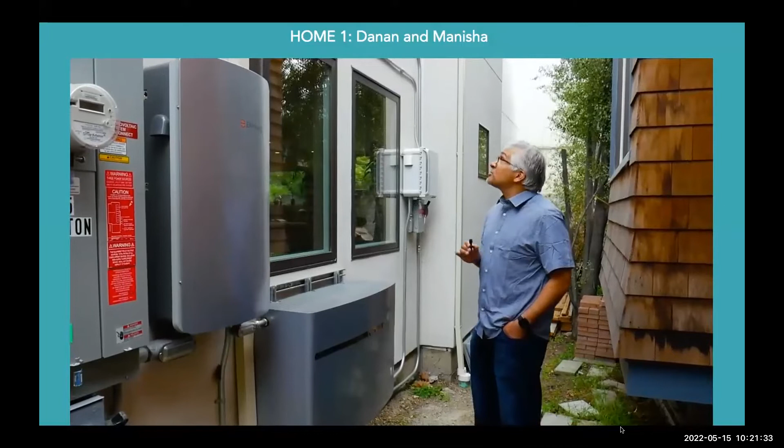We have both solar and storage on this house. This is a 10 kilowatt hour Enphase battery system. We use it both for offsetting peak electricity usage from the grid, and also as a backup battery in the case of grid outage. Something unique about this was that I installed this system using Enphase's self-installer certification program, which is a course you take to certify yourself to design and install these systems.

So we are doing a number of things in this house to effectively load shift our electricity usage. And I want to go over a few of those things. One of them is the electric vehicle charger here, which is enrolled with a program that ensures that the EV charges when electricity is cleaner and also cheaper. And I get paid a small incentive from the EV charger manufacturer to participate in their demand response program.

Thanks for visiting our home. We hope that you're inspired by what we did here to make our home greener, more efficient, more sustainable, and more comfortable.

All right, now we have Dan in here to answer some of your questions. Dan, can you undo your video? Hi. Hi, there you are. And I have, coincidentally, my architect sitting right here, so. Oh, that's exciting. Right on. Yeah. So Rebecca's going to ask the first question.

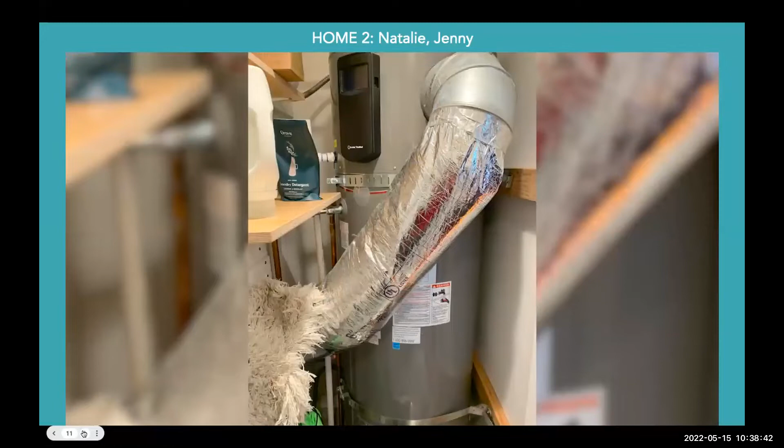As part of making this small house comfortable for everyone, Sarah figured out a way to create a small patio that provides a private outdoor space separate from the rest of the property. Thank you for visiting our home, and I hope that some of these green features have inspired you for your future building projects.

Okay, so that was an extremely cute ADU. And today we have Jenny, the property owner, and it looks like Natalie also was maybe tuning in. I saw her name briefly. Hi Jenny, how are you? Oh no, you're fine. I don't know why Natalie's name, maybe Natalie's name is on my link or something. I may have sent you the wrong one. Not to worry, okay. Everyone, we are talking with Jenny.

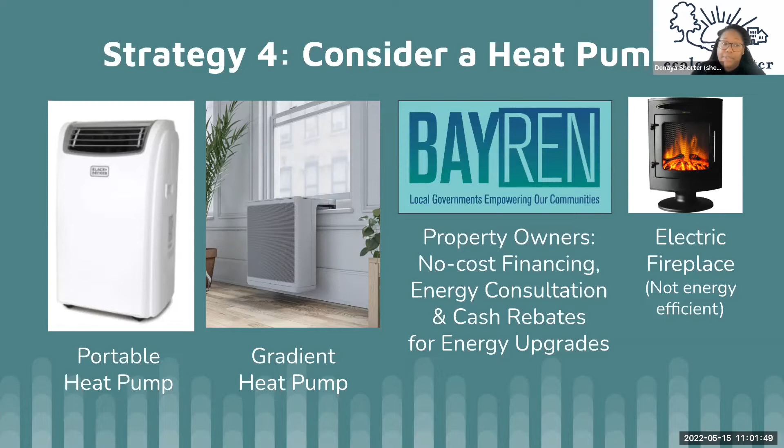And there also are other electric options for heating. Now, to keep in mind, they're not energy efficient, like the electric standalone fireplace you have here. We do want to note it's not energy efficient, but we do want to share it out as an option. Different folks have different opportunities, are able to do different things. So we do still want to bring this up. Plug-in space heaters, electric blankets, electric outdoor patio heaters. Those are other options that you can use to avoid burning fossil fuels. Again, they're not the most energy efficient. We recommend some of the other strategies and options before that, but we do want to be transparent and share all the options available. I hope that makes sense there.

All right, and strategy 5, minimize hot water use. So as tenants, we don't have much control over the water heating system. If your water heater goes out, your landlord or property manager usually has to fix it ASAP. If that's coming up for you in your building, if you've had this conversation recently, that's a perfect time to let them know in advance that you prefer an electric heat pump.

So when that water heater goes out, that's the perfect time to slide in there and see if we can green that home or that building, and the BayREN rebates that are available to them. Of course, like I said, as folks who've been renting for a while, we know landlords are always looking, or most of the time looking, for options to save money. So let's bring that up with them and let them know there are rebates and other incentives that can support

this transition. Less gas plumbing means less flammable gas. So you can appeal to their inclination to reduce fire hazards. They want to protect their properties, so do we. And also we can green the home in the process. In the meantime, again, some more straightforward, really direct things that you can do: reduce your hot water needs.

Rising Sun does green house calls, which are really cool. They'll drop off a free kit. It includes a low flow shower head, also low flow faucets and aerators for your home that you can do quick swap outs. If you have leaks, drips, or a runny toilet, ask your property manager to fix it. They might not know how much that's costing them, not only the impacts on our climate, but they should be motivated because they're losing money by having those things not fixed and not efficient.

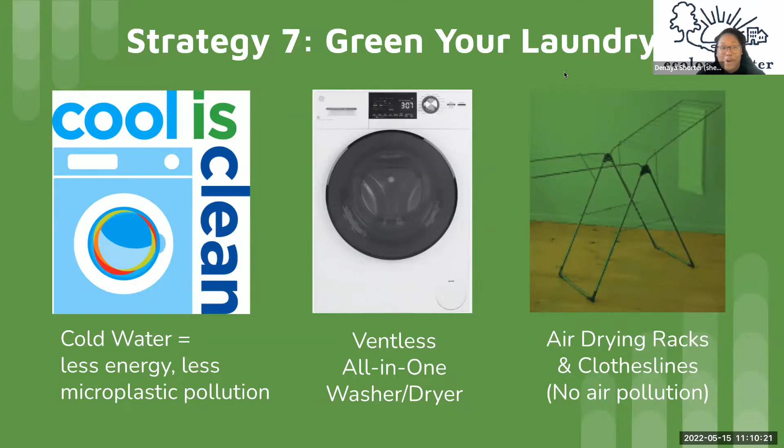In lieu of using that gas dryer, of course, we already saw some built-in options in some of these homes. Just dry your clothes the old-fashioned way, hang them up, hang them over your couch, wherever you need to, hang them outside. It's warm enough out here in the Bay for the most part that you can get those clothes dry without even needing to put them in the dryer, period, whether it is hot or cold. And if your rental unit has a washer hookup, consider one of those all-in-one washer dryers. It's ventless, it's really energy efficient, and it takes up way less space, which is always important for renters.

All right, strategy 8 here, sequester carbon in outside spaces. So rentals come in great variety, from houses to high rises. And if there is any yard space or patches of landscaping, there are 3 things you can really do to sequester carbon in the soil. We've already heard a bit about this. Spreading compost and mulch on unpaved spaces. Compost is actually turning out to be a really powerful climate change tool. So spread compost and then cover it with mulch.

EBMUD has coupons for mulch. City of Berkeley has options for free mulch that folks can pick up. Follow up for more resources and information about that. It keeps both moisture and carbon from escaping into the atmosphere. So that's just, again, a really quick thing that you can do in your rental outdoor spaces if that is

feasible for you. StopWaste is also rolling out a brand new program where you can get free compost at a compost hub such as City Slicker Farms, and then like I mentioned, I know the City of Berkeley, there might be other city-run programs if you're in another local East Bay city that has those options. So kind of look out for them if you're not familiar.

Plant trees, shrubs, woody perennials like rosemary, anything that's meant to last a long time. The longer the lifespan of that plant, the more greenhouse gases it captures. So just think about planting if you have that option in your rental space, or if you're a landlord, planting some things for your renters there.

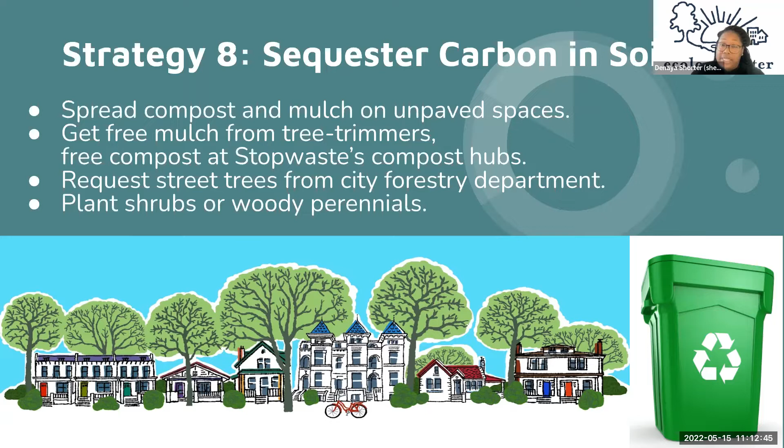Properties located in, I think, Ashland, Cherryland, Hayward Acres, and unincorporated Alameda County, I've seen on that Cooling Communities program. There are likely other similar programs in other counties, Contra Costa County and things like that. So kind of look out for them, seeing if you have one locally, or getting involved in your local community to see if we can ramp up a program.

And then, as I mentioned before, getting off plastic. If you are familiar with the Ecology Center at all, we do a ton of plastics reduction work, and there's always really simple swap outs that you can do that will just overall help to green your home and green your life.

Oil and gas companies, they see the writing on the wall. Electric vehicles are going to replace internal combustion engines. They're just better all around. Induction ranges are replacing gas stoves. Heat pumps are replacing gas furnaces. All of these things, they're happening. We're moving forward. And oil and gas companies are really just doubling down on trying to elevate this message that we need plastic, which is complicated, but it's not true for the most part.

Just try to get off plastic as much as you can make the switch. If you haven't been to the Ecology Center store, we have tons of great alternatives to plastics, from kitchen, gardening, non-toxic children's products, books to help you learn more about why you should get plastics out of your life. And also, of course, following up with us at the help desk. We're happy to answer any of those questions.

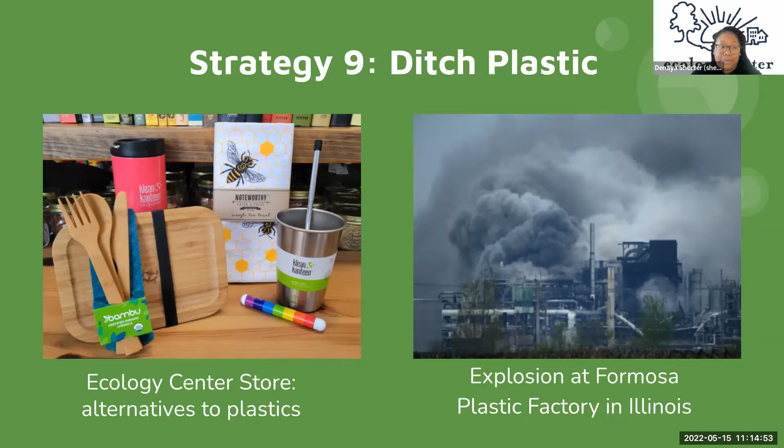And strategy 10, all electric multifamily housing. As I've said, this presentation, we really wanted to prioritize renters, or landlords of rental properties. If you're apartment hunting, it's good to know that all new construction must now have rooftop solar. Amy mentioned looking at some of the drone footage, you're seeing it a lot more, which is really great. And all new construction in a lot of East Bay cities also must be all electric. So that's great as well.

Some of the new apartment units being built are affordable housing. So having options, as we know, the housing crisis is real. And here, knowing that there are affordable housing options that are green is great.

So kind of look out for those if you're looking to rent or might be coming up on needing to look for housing. Here are a few East Bay multifamily complexes that are all electric with solar, heat pumps and electric kitchens. Top row are both affordable housing developments: Everett Commons in Alameda, and St. Paul Commons in Walnut Creek, both affordable multifamily housing to keep a lookout for.

And then the bottom row here, Ice House in Emeryville, Station House in West Oakland, and Coliseum Place is being built now in Oakland as well. So keep a lookout for those properties as well. Tell your property owner about some of these products.

It looks like we're up on time. We have a ton of these. All of this information will be shared in the resources. There's lots of great programs to look out for to share with your networks on greening your home. Again, if you're a renter or you're a landlord, all of these informations and strategies are relevant.

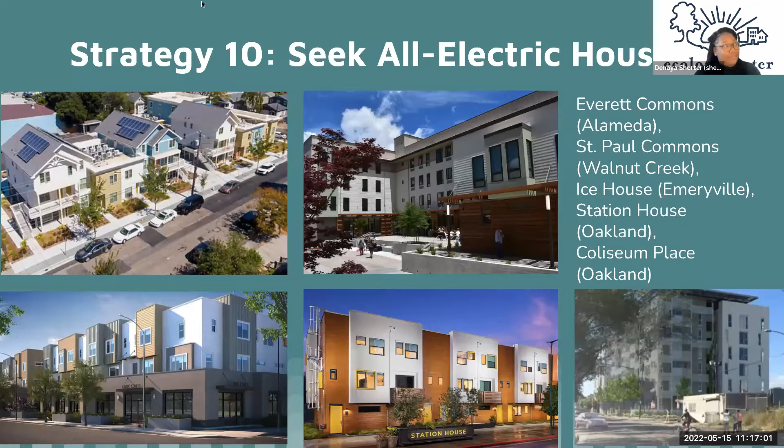Sorry to run over, but thank you so much. We hope that was a little bit of a pivot on rental options, and I'll pass it back to you, Amy. Thank you, Denaya. I know that was just a ton of content, and thank you for pushing it through. It was awesome.

So the next video that we're going to show actually has two homes in the same video. And I'm really excited to show these homes because these homes are remodels that were done with the organization called Bloc Power. And we're going to have a representative from Bloc Power afterwards for the Q&A. So these are ways that energy efficiency and electrification is coming to underserved neighborhoods, and it's great. So let's check it out.

Hello, I'm Mark Hall, the founder of Revalue.io. We're a local company that prepares buildings for the transition to clean... Hey, Amy, you're going to need to share your screen. I'm sorry. Thank you. Try that again. Yeah, of course.

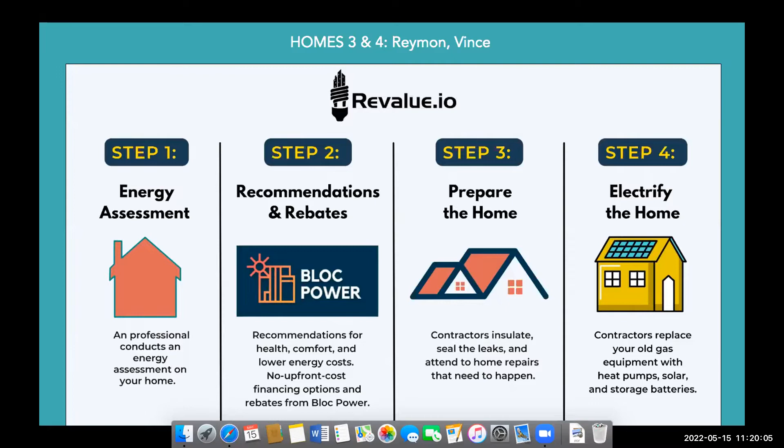Wow, it's been about 3 years that I've owned this house, and I can remember like it was yesterday when I closed on this house. My wife and I, we had been looking for like 5 or 6 years for a home, and finally our dreams came true. And it was not only a home for us, but one more for another family.

So when I first bought this house, I worked in workforce development, and to some degree, I still do today. But while in the trenches, meeting people and shaking hands and building relationships, I met Mark, the CEO of revalue.io.

And as I talked about my new home purchase, he got more and more interested in my long-term goals with the property. And fast forward a year from that point, well, not even a year, he had me fast-tracked on a plan to get my home updated and modernized.

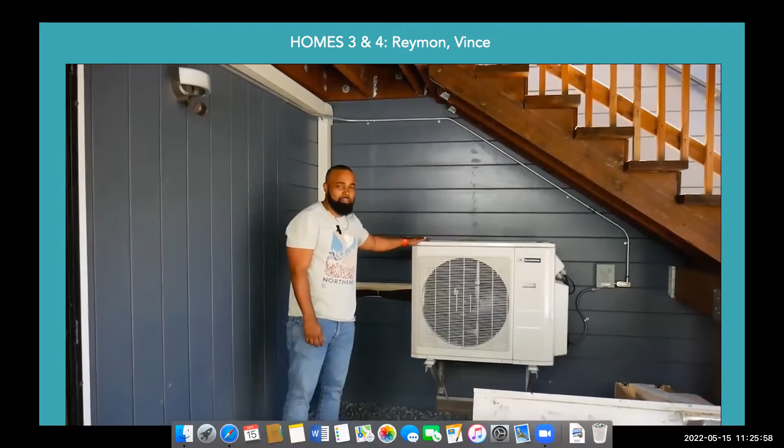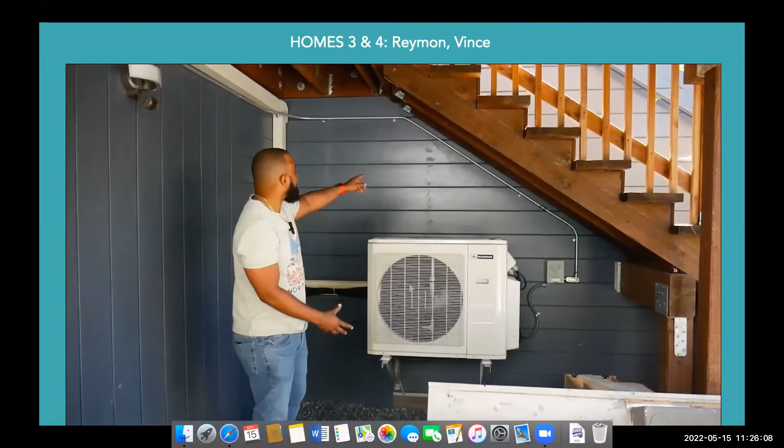But to tack on to that, you see this mini split system right here, strategically placed so it's not in the way. It's not an obstruction and not a hazard. And this hooks up, and actually Revalue helped do this, all the way from the back of the house to the front of the house. So it's not too much of an eyesore, doesn't bring too much attention to it, but above all, we stay cool and we stay hot.

One of the biggest expenses that I was not looking forward to incurring was the cost of splitting my 2 units' utilities. And so after talking with Mark and kind of picking his creative mind, he came up with the solution like, hey, why don't we do this through our program? And so, long story short, we were able to split the 2 units, 3223 and 3221 Helen.

And not only that, we got the bonus of this beautiful looking Span panel, which is just fantastic. There's an app associated with it to control, if you want to control outlets and you want to monitor your output. All that sophistication is built in this Span panel. So yeah, special shout out to Mark and his team. Very professional, very beautifully done. I'm very happy.

All right, my name is Vince Gibbs. I'm here in the northern Oakland, Emeryville, Berkeley border. I've been here for about 5 years. The house that we live in was previously my wife's family's house. We purchased it when her parents passed.

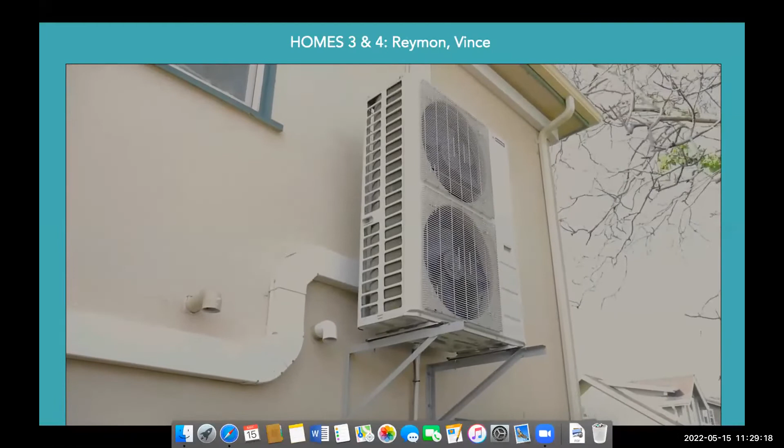Next, after insulating the walls, the next thing we did was install mini split systems. And what appealed to me about the mini split systems is an individual unit in each room, which included air conditioning, which here in the Bay Area we don't need very much, and I don't think I've used it at all.

So the overall end result here was A, a more comfortable house, B, reduced our energy by at least 10%. I haven't done the calculations recently during the winter months, but it was noticeable on our bill. And the next iteration of this is to add solar to the roof, which is already in process.

All right. Here is my mini split unit for my office area. So I get to control the temperature in here, independent of the rest of the house, which I particularly like. So yeah, and it's very comfortable for me.

So one of the parts of, I guess the last part of this project was to get solar on the roof. And before we could actually get the solar on the roof, we had to make repairs to the roof because it hadn't been upgraded or maintained in quite some time. So what Revalue was able to do for me was to wrap the roof repair, which was actually a new roof surface, into the cost of the entire project, which includes the solar.

So overall, we end up with a more efficient house on the inside, a repaired roof on the outside, and eventually, which will be the last part of the project, will be solar, which will significantly reduce our electrical bill.

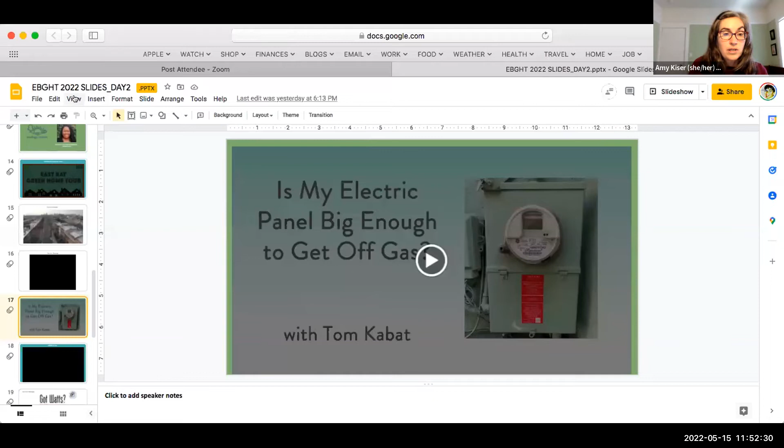And now we're going to go to a home in Rockridge, and oh no, I'm sorry. We are going to a presentation that I recorded earlier with Tom Kabat, who's here today answering lots of questions in the chat. So a lot of times when you go to electrify, people will tell you that you need to upgrade your panel or upsize your panel. And so Tom is someone who's really been focusing on making the most of the 100 amp panel. So here's a presentation.

So if you want to retrofit your home to go all electric, do you need to upsize to a 200 amp panel? And is this a hurdle that we all need to jump over eventually? Well, no, we don't. Most homes can electrify just fine on a 100 amp panel because the electric panel is really one of the most underutilized pieces of equipment in the house. A 100 amp panel can deliver 24 kilowatts of power at one time. That's a whole lot of power. 24 kilowatt hours in an hour. That's equal to 32 horsepower. So it's like a third of a car engine out there running on the side of the wall.

Like, I need hot water, and I need a comfortable space that's both cooled and heated with an efficient heat pump. And I need to get enough energy into my car by morning to be able to do my daily commutes, et cetera. So we're looking at those different things and trying to see how to fit them together. Basically, what we find an electrification plan contains is it can be anywhere from simple to complex. At the simple end, it could be just a list of the sizes and types of appliances needed.

Say, like a heat pump water heater that's big storage, like 80-gallon size of storage, but a smaller circuit, say a 15-amp circuit that doesn't draw much power, and it takes advantage of the big storage tank, 65 or 80 gallons, as like a thermal battery, so that it can be slowly charged up during the day, and it's got plenty of hot water to deliver anytime we need it.

And then for the heating and cooling, we're finding some of the solutions are just using, say, a ducted 3-ton size. A ton means 12,000 BTUs per hour, but say 3 tons or smaller, inverter driven, and that means computer controlled. The heat pump can slowly pace itself up and down and really exactly match the temperatures we need in the house.

Other things we find in the planning is it pays to look at the type of clothes drying they'll want to do. And so here, I put the most power efficient one, which didn't require any additional circuit. It would be, say, using a combined machine where you put dry, dirty clothes in, and 2 or 3 hours later, you get dry, clean clothes out of the same machine.

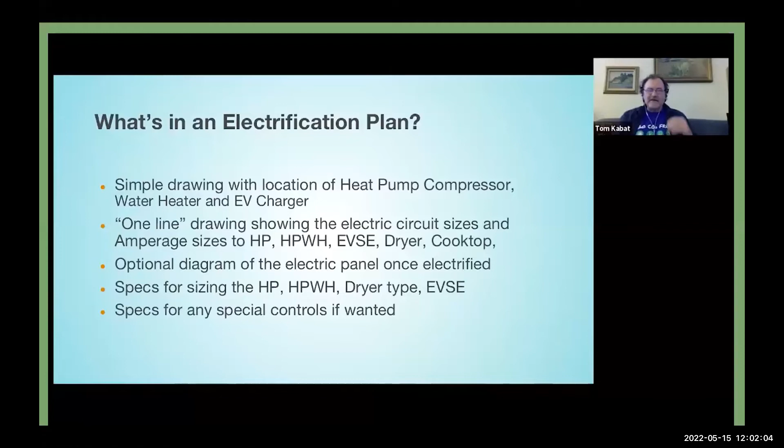They started with a device early on called Dryer Buddy, which is a little box about this big that plugs right into the dryer socket, the 240 volt socket on the wall that your electric resistance dryer plugged into. And then you would plug your dryer into one side of it, and it got power whenever the dryer was turned on. And when the dryer was off, there was another socket on the other side where you could plug in your EV charger. And so your EV would wait until the load of drying was done, and then it automatically activated.

So that's the first type, and there are now about 4 brands of that type of plug-in circuit splitter, including brands like NeoCharge, Split Volt, and Dryer Buddy. I've forgotten any others. But then there's hardwired devices, one called Simple Switch, which hardwires in there, and then it's not just a plug in the wall thing.

And then there are pausers that measure the total power running into the whole electric panel, and they only pause your car charger if the whole electric panel loading has gotten up over 80% of its rating, which rarely happens. So in that kind of a system, you'd have very few pauses per year on the car charger, because in my panel, I rarely get over 20% of its usage. So I would never end up having to pause the car charging on that one.

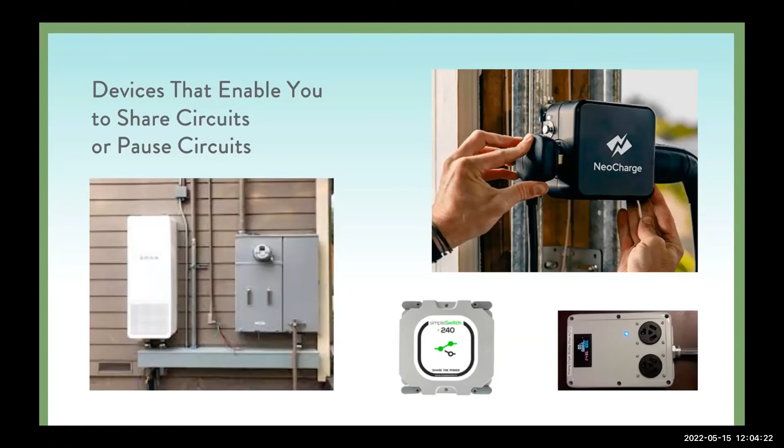So there, we've got lots of solutions now, from plug-in devices to hardwired separate devices to hardwired pausers, and now whole panel prioritizers. So more of this is coming on the market that's making controls a really easy way to go about this.

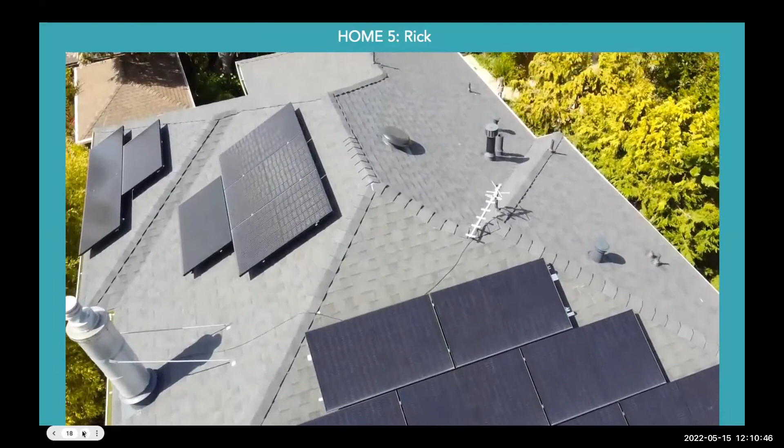And before we moved back, our friends were sending us videos of how smoky the East Bay was. And the first summer we moved back, it was too smoky to go outside a couple days. And that really made me pretty angry. I thought it was unfair that my son, after COVID, was going to have to shift from masking due to the pandemic to masking outside because it's so smoky. And my wife and I sat down and said, what can we do to try to prevent climate change, make the East Bay cleaner? And we thought, hey, solar's the way to go.

So right now, my solar panels provide enough energy to keep the house off the grid during the day. And also, my batteries are great because this is my solar energy at night. When the sun goes down, the batteries can carry the entire load on my house, sometimes all the way through the night. Last night, they lasted until about 6 a.m.

And why that's really great is when the sun goes down everywhere over California, all these massive grid scale solar plants stop producing. So a lot of dirtier plants like coal and natural gas kick on. So if I can do my part to keep the grid clean at that time by not taking a bunch of demand, that's less of a carbon footprint and cleaner air and hopefully less summer fires in California.

In addition to keeping the grid clean at night by not picking up a lot of demand, I love my battery system because if there's ever a storm, I know that I'm going to have backup power. So right now, my system is a 20 kilowatt system. At all times, I maintain 30% of the battery on backup.

And that's really important to me because I have a sump pump downstairs. So say, for example, there's a horrible rainstorm, power goes out, my French drains drain to the sump. So if I shut off all the rest of the power in my house, I know that my sump pump will be able to operate for 2 or 3 days, and I won't have to worry about the basement flooding.

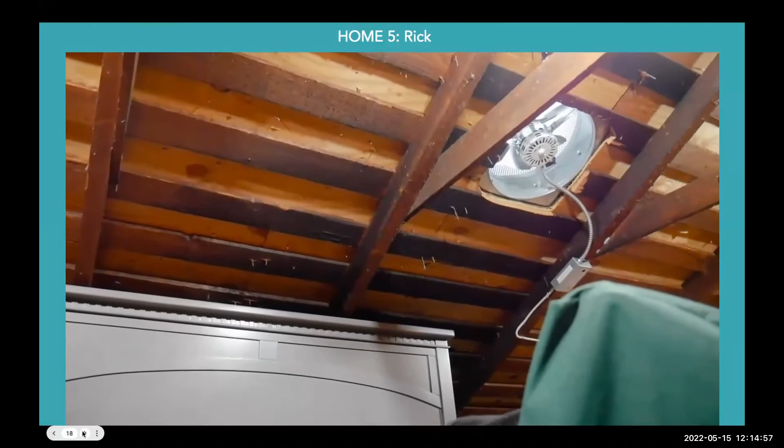I also have an attic fan up here, which is controlled by a temperature rheostat. So whenever the temperature in my attic hits 100 degrees, the fan kicks on and sucks in cold air from outside to replace the super hot air in here.

I don't think you can see it, but I'm sweating. It's so hot right now.

And what that does is it minimizes the temperature differential between my attic and the bedrooms below, and it just makes the insulation way more effective at keeping those rooms cool in the summer.

So I'm standing right now below where I was just sitting in the attic, and you can see the ducting for the heat pumps coming out of my ceiling. Very low profile, and actually very quiet when you're in the room. Unlike a forced air system, when it's on, you can't even hear it. You just feel the conditioned air coming into the room.

Very nice. So one of the things I noticed when I moved into this house is that the windows were drafty. So there was a lot of hot air, cold air coming into the room from outside. And it was also pretty noisy. So one of the easiest ways to achieve energy efficiency in the house was to actually replace some of the windows. On the front of the house, that was difficult because we have these beautiful windows that were built in 1915, and we really wanted to maintain the character of the house.

So we found a custom window builder who replaced the old single pane glass with a special plastic laminate. So there's glass, there's plastic, and there's more glass. And what that does is it really helps maintain the conditioned air in the house, but also because they're new windows, there are fewer gaps, so you don't have as much of that drafty air coming back and forth. And being on a busy street, this also cuts way back on noise pollution. But overall, it just makes for a really comfortable room.

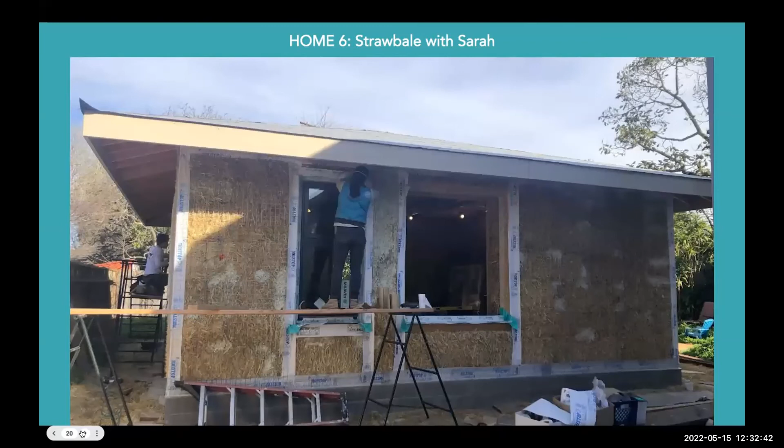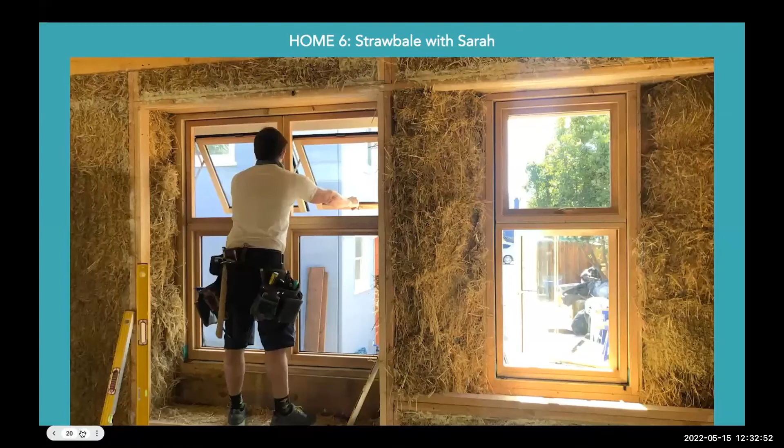The walls are made by stacking 2 foot by, I can't remember, maybe 3 foot straw bales with some rebar kind of keeping them all aligned. And then the exterior skin is lime plaster around 1 inch thick on both sides. And that is the rigidity for seismic, for shear walls.

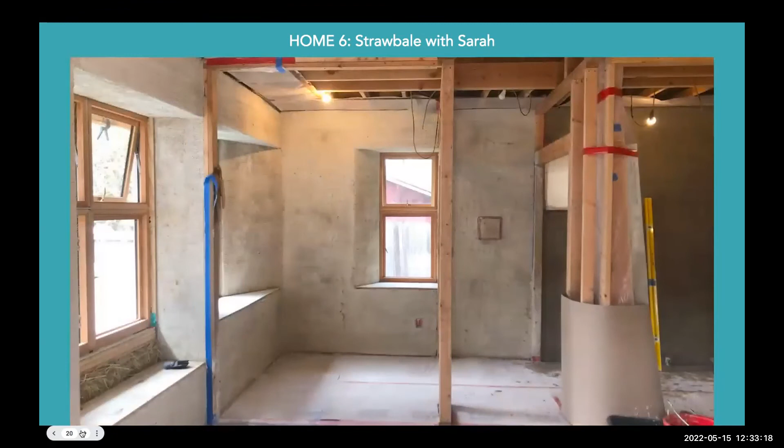There's a little bit of lumber, FSC certified lumber in the top to support the roof and sort of to frame the openings for the windows and doors. There is wood supporting the roof, and it has a very deep overhang, and he built the roof before he built the walls so we could be certain that they didn't get wet.

The light fixture is from Metro Lighting, which means it was designed and built in Berkeley. The doorknobs and the switch plates and various other things are unlacquered brass, which bacteria can't live on. Viruses too, I think. Climate change has made our fire season longer and more painful, and straw bale is extremely fire resistant. So it's a good choice for people living in wildfire interface zones.

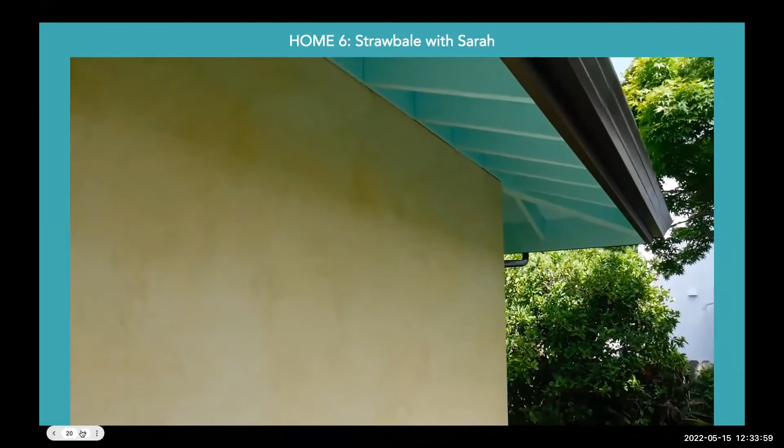Okay, have we been able to find Sarah? We have. Sarah was just wrongly named. I'm here. Hey there, Sarah. How's it going? Good.

So, Rebecca, do you want to start us off with questions? Yeah, well, Sarah, welcome back. We got to see two of your ADUs today. And, you know, questions about the straw bale. So first of all, what sold your client on this idea of straw bale?

I am not 100% certain, but I'm guessing it was the greenness. It made a lot of things simpler because the R value of the walls is, I don't know, somewhere around R30, which is almost double a normal wall. And the lime plaster is thermal mass, which in our climate that has cold nights and warmer days, dampens the temperature swings.

So the straw bales are a locally sourced waste product that's normally burned. So there's a lot of greenness there. I'm guessing the thick walls, you know, it's a trade-off. Their lot isn't huge, so they gave up some space, but they're just architecturally really nice, I think. But yeah, you'd have to ask them. I did not ask them that question prior to this interview.

Maybe you want to lower your utility bills. Maybe you want to be part of a cleaner energy future. Whatever's on your mind, there's an app. Well, an appliance for that. See why so many people are making the switch to electric appliances.